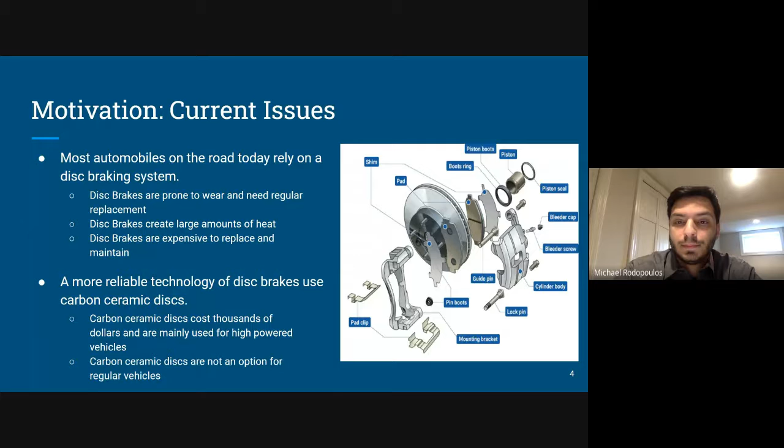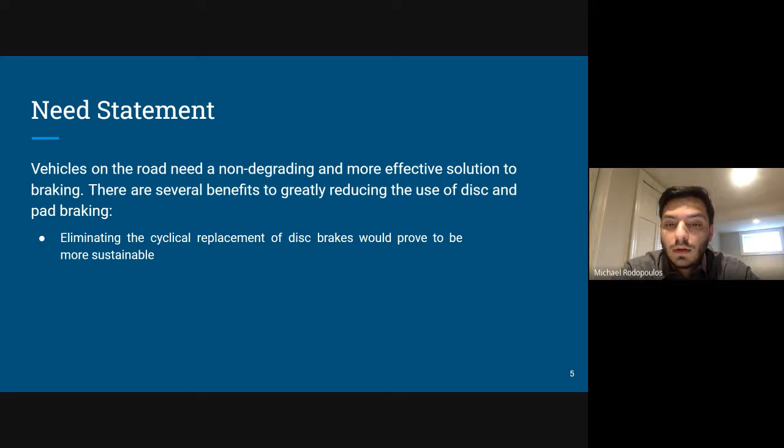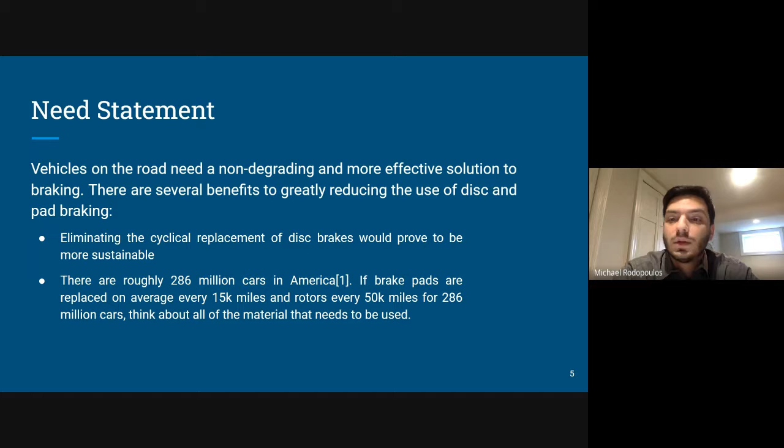So vehicles on the road today need a non-degrading and more effective solution to braking, and there are several benefits to reducing pad braking or physical braking, such as eliminating regular replacement and maintenance on braking systems. And based on interviews with customers, we learned that they would like to have a system that requires less maintenance, and that they would save money in the long run by not having to conduct regular replacement, maintenance, and things of that nature.

So for our project selection, at first we discussed magnetic clamping. This would be where we use electromagnetics to provide braking force using friction. It improves efficiency, but it still has the issue of physical wear. Next, we discussed a fully electromagnetic braking system. This does not provide enough force without running into issues of heat, and ultimately the device would not last very long.

So for the project summary, we decided to use a magnetic force using neodymium magnets placed in close proximity of an iron disc. The servo will be used to move the magnet into place. Object detection will be done using a LiDAR sensor, and it will detect distance and give us information to then provide braking.

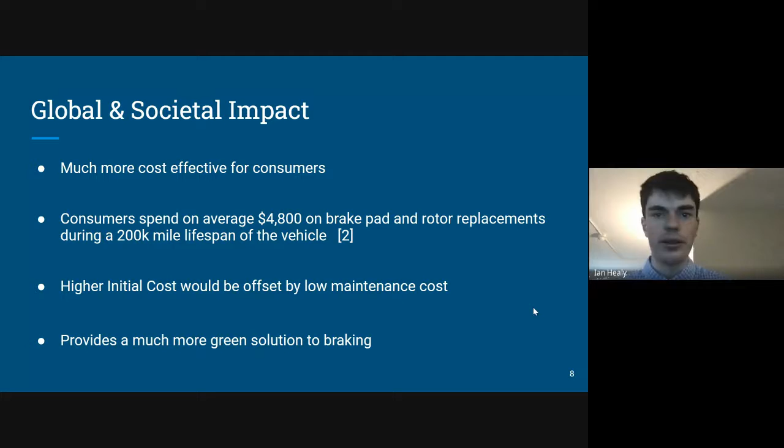So the reason, again, why we chose this problem is that it's much more cost effective for consumers. They don't have to spend so much money. On average, over a 200K lifespan of a vehicle, consumers will spend $4,800 on brake pad and rotor replacements. That's something we want to cut out. And if our solution does have higher initial costs, it will be offset by basically no maintenance cost. And it provides a much more green solution to braking.

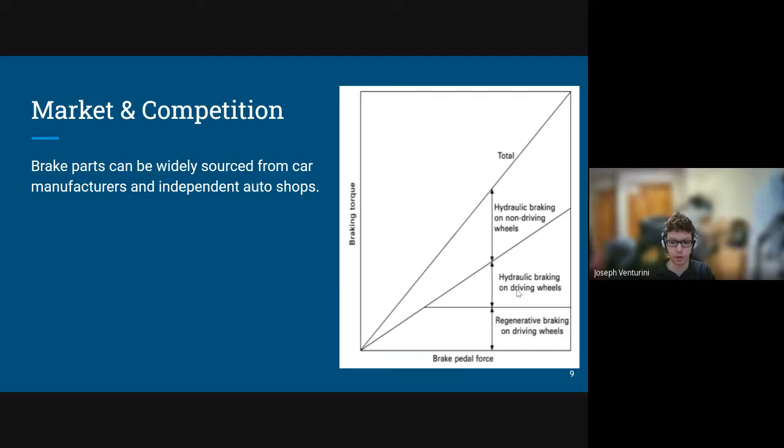So for our market and competition, brake parts can be widely sourced from car manufacturers and independent auto shops. Electric vehicles today utilize a regenerative hydraulic hybrid braking system. Regenerative braking only applies a small amount of brake force itself, and the hydraulic brake system still accounts for a majority of the braking torque, as you can see on the chart on the right, while regenerative braking is a little bit lower on the scale.

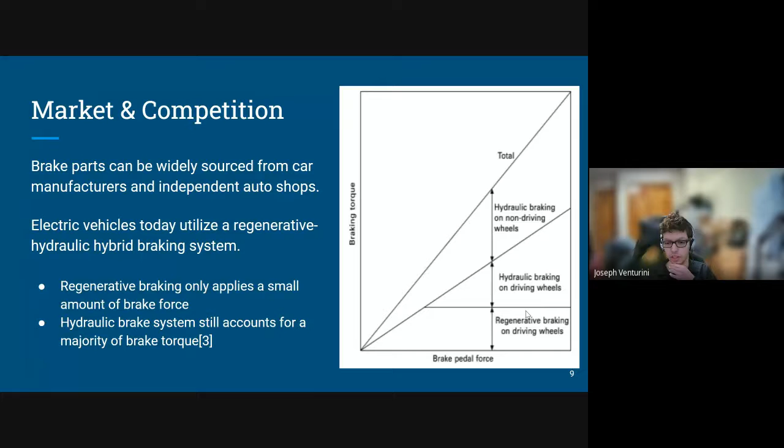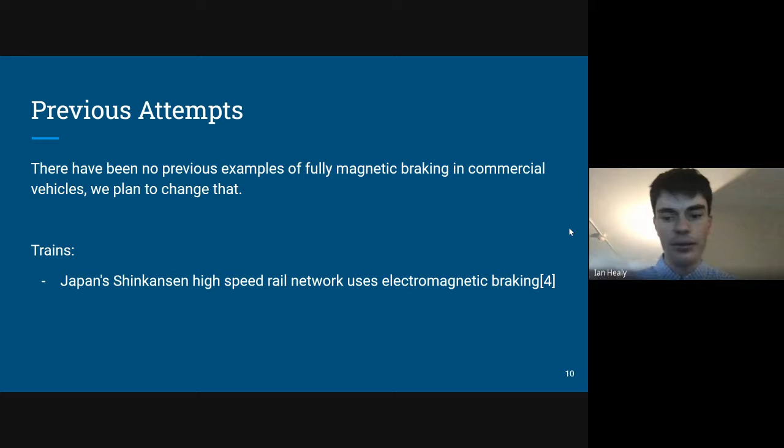So there haven't been any previous examples of fully magnetic braking in commercial vehicles. We plan to change that. But in trains, Japan's Shinkansen high-speed railroad has some of the best safety records on the planet. It does run on electromagnetic braking. Over the last 50 years, there hasn't been a single fatality or injury. So it just proves how safe electromagnetic braking can be if we can fully implement it in cars.

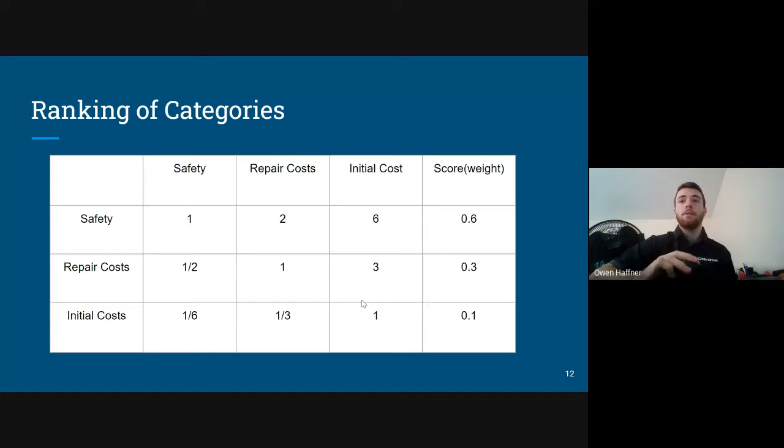So if it wasn't already apparent in the previous two figures where safety had the biggest number in the charts, safety is absolutely the number one priority, especially in any braking system, and should be in any project. In the case of braking, we don't want the system to brake too fast, like the way you stop short.

If the initial cost is higher than standard braking, then it should have much lower replacement and repair costs, as I said previously. Additionally, if the initial cost is higher, then there should be improvements in the braking performance with the lower replacement and repair costs.

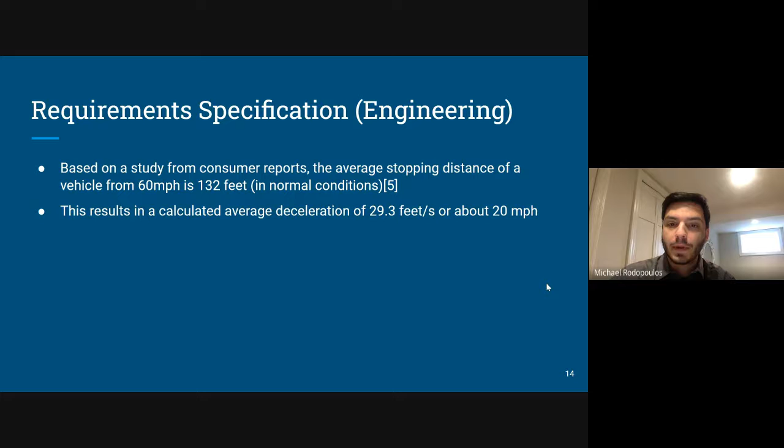All right, so some of the requirements for engineering the system. So based on a study, we found that the average stopping distance of the vehicle from 60 miles per hour is about 132 feet. That is in normal conditions using standard coefficient of friction. So this would result in an average deceleration of 29.3 feet, or about 20 miles an hour. And so we want our system to have about a max deceleration of 32 feet per second, which would relate to 22 miles an hour.

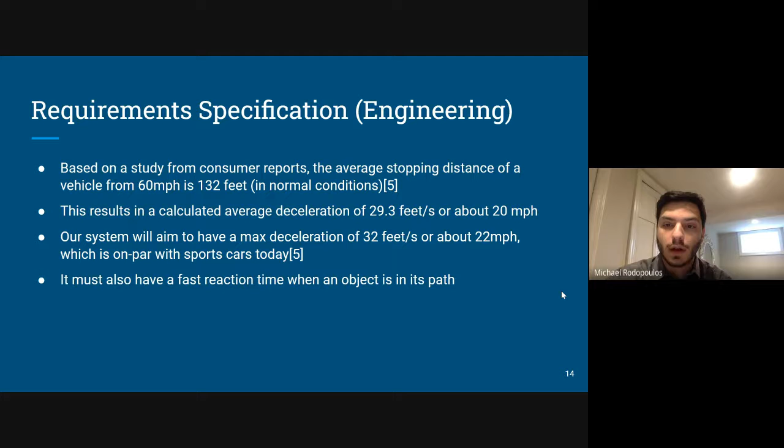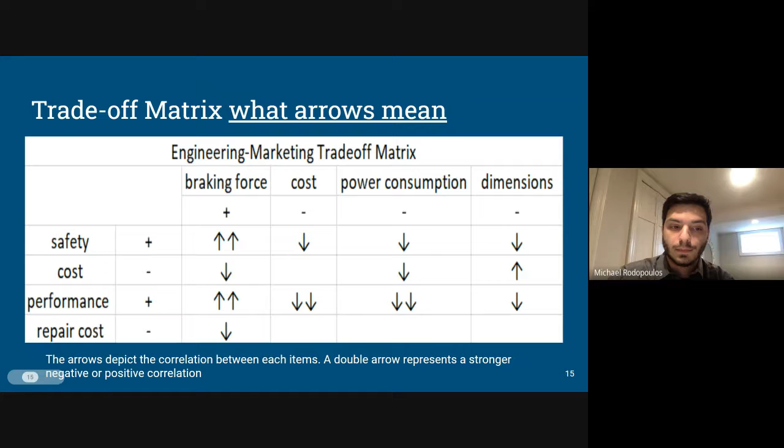And we also would like it to have fast reaction time when detecting an object to have maximum safety and maximum performance. Here's the trade-off matrix. So we have the arrows indicating how strong the correlation is, whether it's positive or negative. So as we can see, safety and braking force, they're both heavily positive correlation, whereas the performance and the cost have a strong negative correlation.

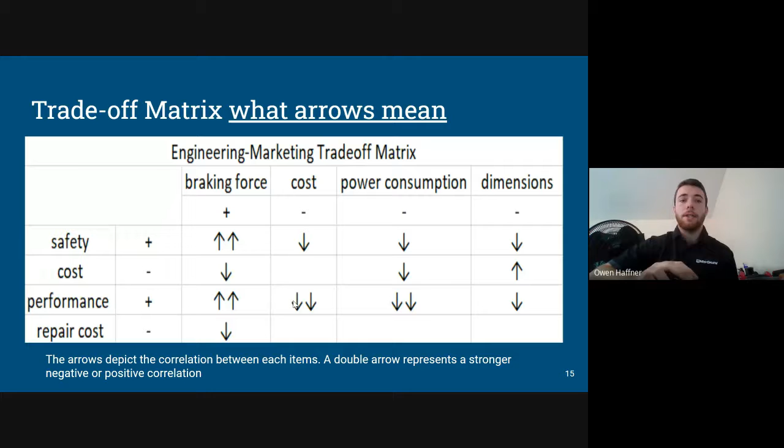Here's some of the theory that we used in our requirement engineering section. So using physics, we can calculate the distance needed to decelerate or to fully brake an object. That would be through the initial velocity over 2 times the acceleration. But that would not be a sufficient equation if we were, let's say, on a hill or some kind of an angled slope. So in that case, we need to account for gravity, and you can see the second equation. So now you're taking into account gravity, the road grade, and the coefficient of friction between the tires and the roads, which is variant depending on conditions.

And then also we can use magnetic equations to solve for the attraction force between our neodymium magnets and the pure iron disk, which would be A equals C over D squared. A would represent the attraction force. C is the coupling constant between the neodymium and iron disk. And then D squared would represent the distance between that magnet and the disk.

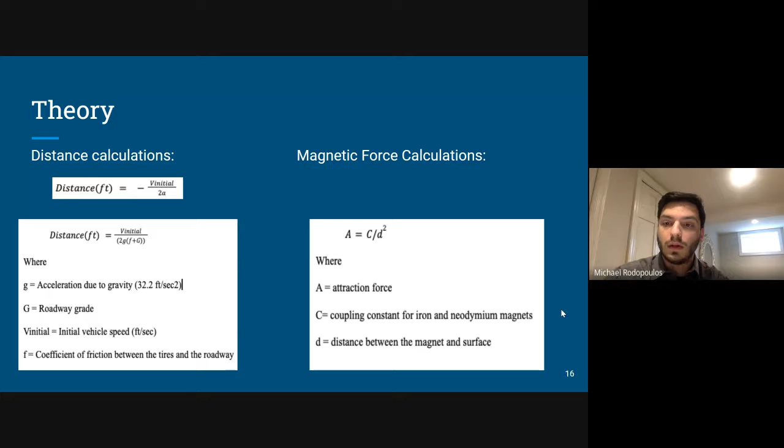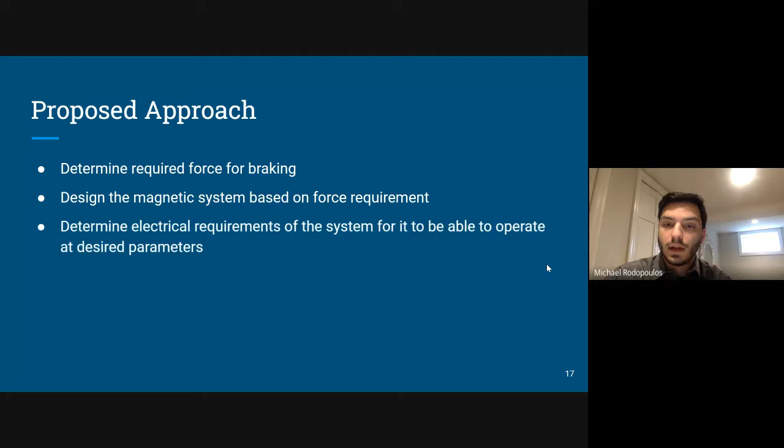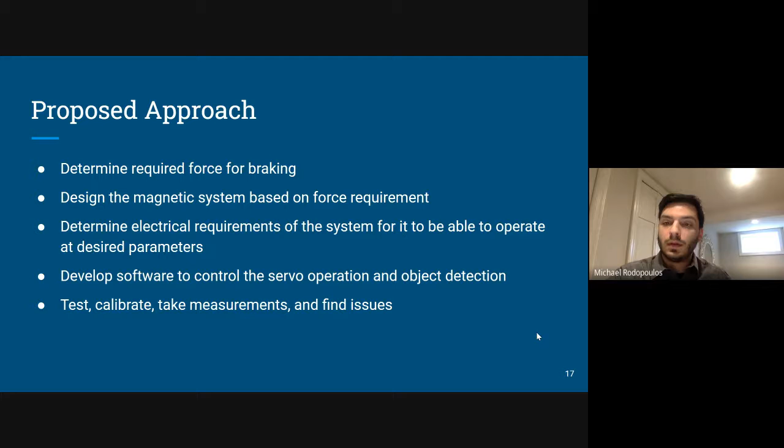So our approach, we first determine the required force necessary to meet our engineering requirements. And then from there, we are able to design the magnetic system and electrical components, which would be needed to operate at desired parameters. And then lastly, we can develop software needed to control the servo, to run our object detection system. And we can bridge that together with the hardware in order to have a complete system. And we would test our system, calibrate, take measurements, and solve any issues that might arise during testing.

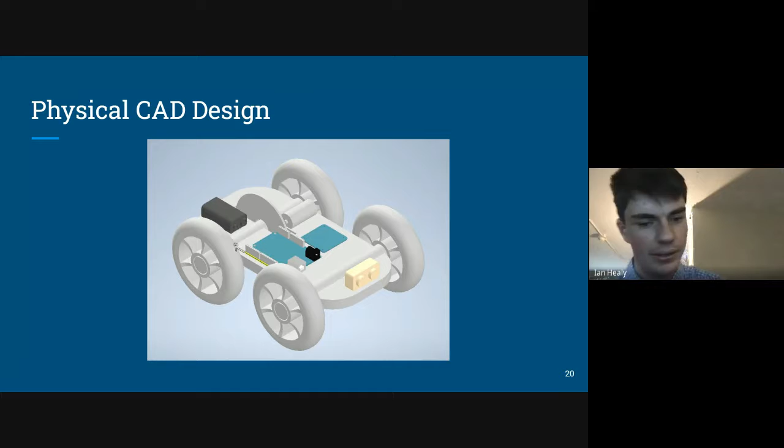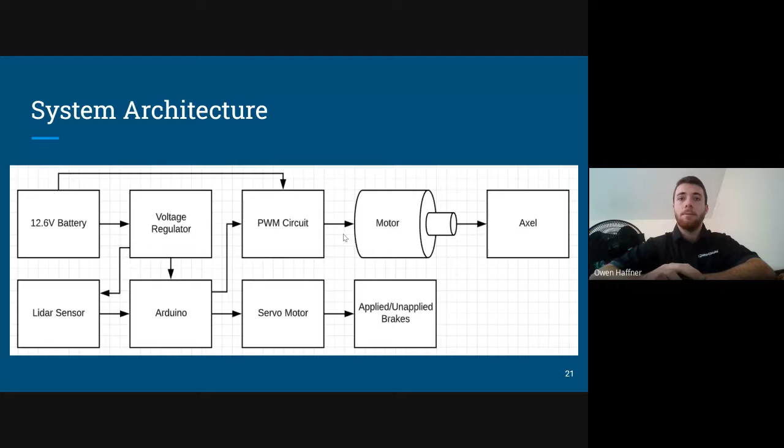So here we just have a little CAD design I threw up in Inventor. It just has a general outline of what our car should look like as a completed project. On this next slide, we have the system architecture, basically just showing the overall block diagram of what's going on here, very similar to the last slides, involving the PWM circuit, as we'll see in the next slide with the electrical schematic, the motor driving the axle, so on and so forth.

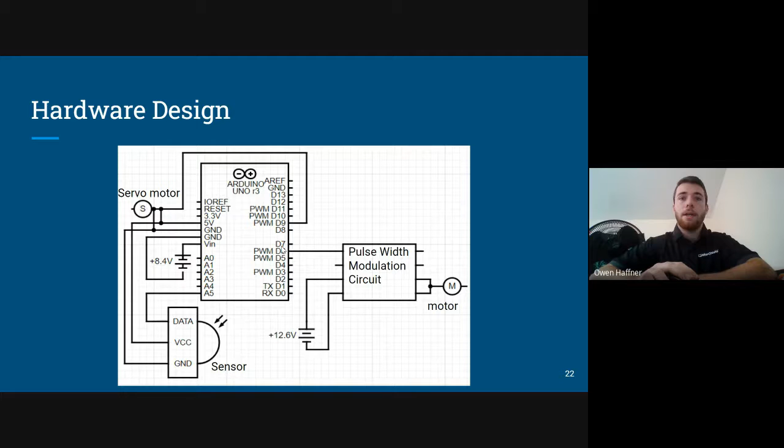So now the hardware design, we have the sensor. You can see the input. It's taking power from the Arduino Uno. The Arduino Uno is getting power from a voltage regulated power source. The main battery is powering the motor, which is modulated by a pulse width modulation circuit, which is also controlled by the Arduino Uno, taking input from the sensor.

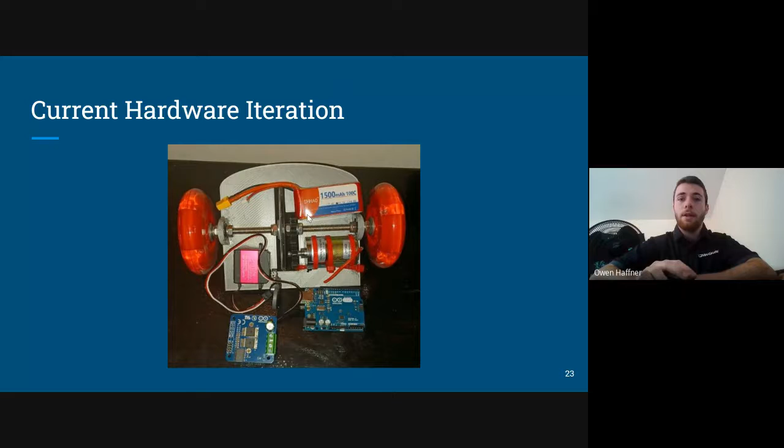This is the picture of the current design. We have the front half of the car built right here. It's involving the motor, the servo with the magnetic plate, moving into position with the iron disc. This is the battery, the lithium polymer, Arduino Uno, and the PWM circuit.

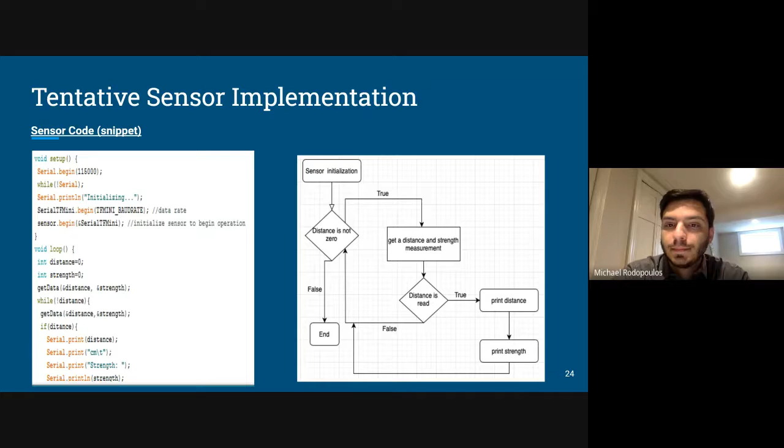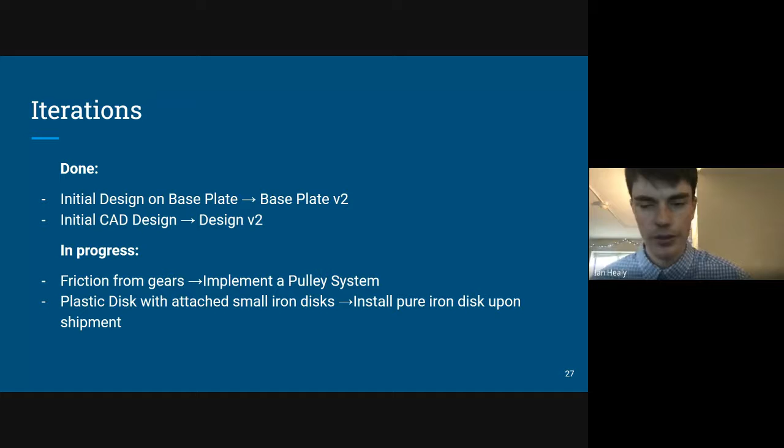Here we just have some of our iterations. We had initial designs of the base plate that were changed and CAD designs that were changed in progress. We're having friction from gears, so we plan to implement a pulley system. And we also plan to install a pure iron disc upon shipment. It's shipping right now, but when that comes in, we'll be able to add that.

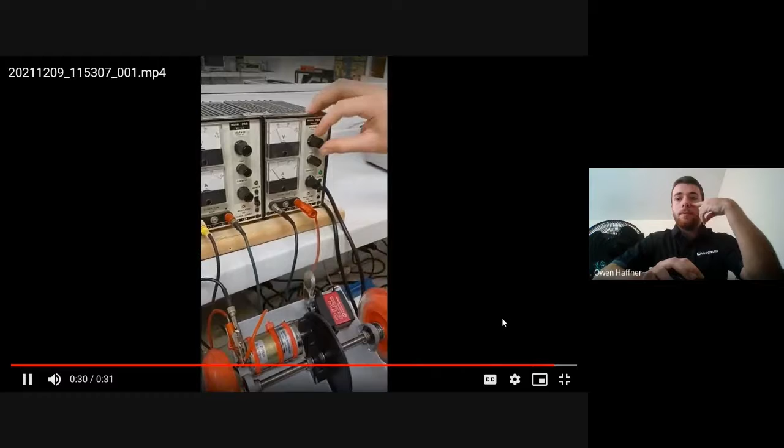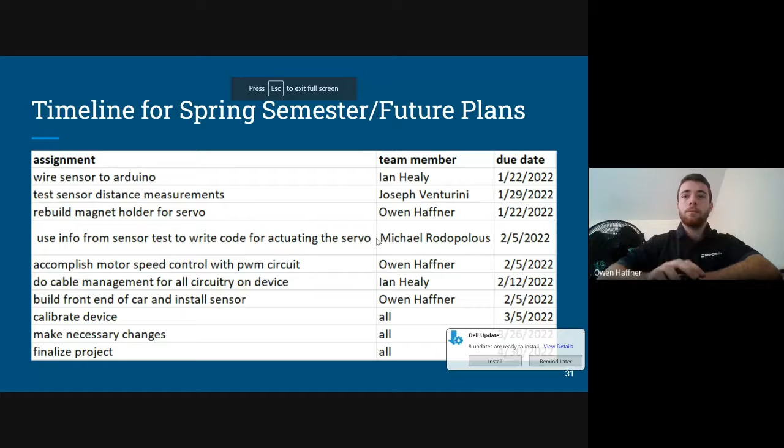So we're looking to, in the future, smooth out that motion with the gears. Next slide. We just have a short timeline for our spring semester and future plans. I'm not going to go into detail.

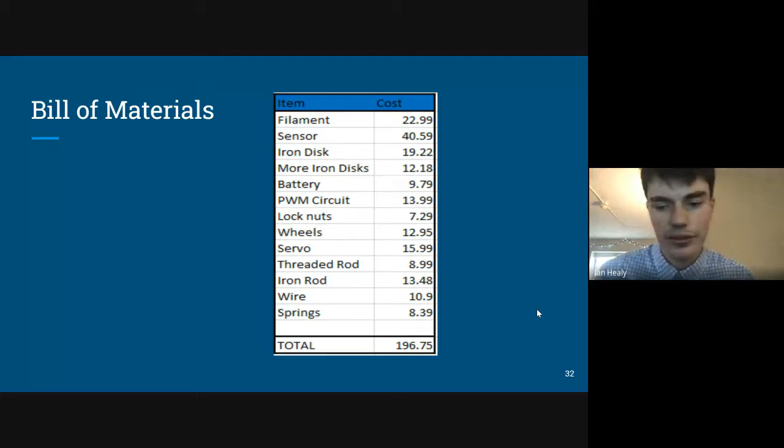And here's our bill of materials. We've bought all the parts already, so our cost is under budget, and we plan to stay within the budget allocated.

So for the future work, we are planning on finding a smoother way of using the motor to drive the axle, so it could possibly be a belt-driven system. We will have to use the sensor and get that to work properly to get accurate distance measurements. We then have to combine the code with the hardware to move the servo, provide the proper amount of braking force, and then calibrate the device.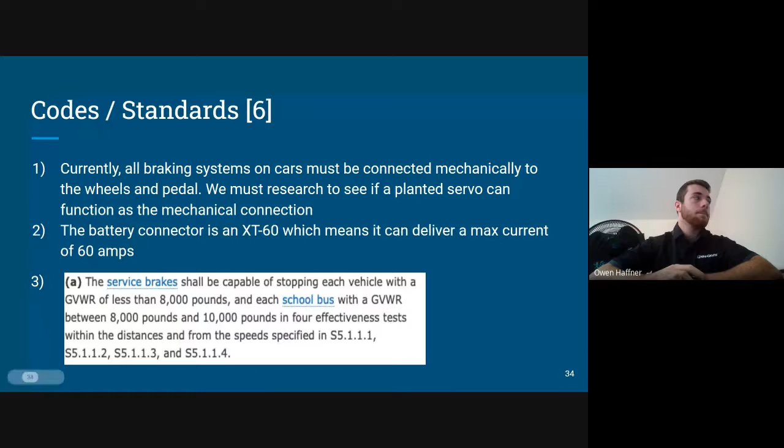So we just have some codes and standards, so I'll make this quick. Currently, all braking systems have to be connected mechanically to the wheels and the pedal. We need to research to see if a planted servo can function as a mechanical connection. Our battery connector is an XT60, which means it can deliver max current at 60 amps. That's a standard. All battery connectors use that.

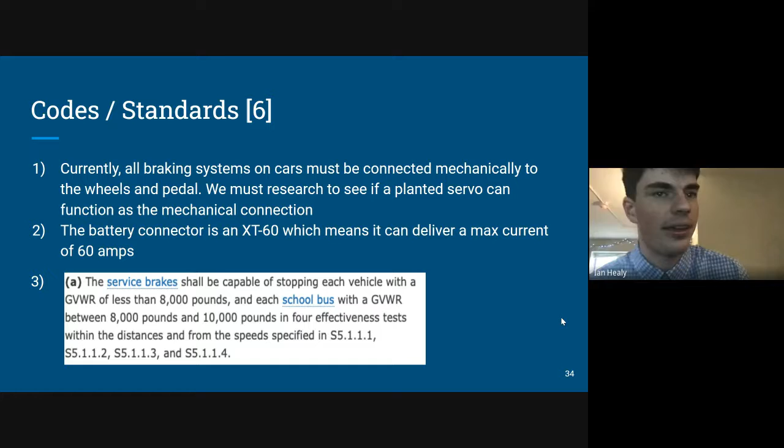And also we have some of our testing at the bottom there. It's some codes that all braking systems must go through. They have specified speeds you need to brake at in effectiveness tests, and we're going to test those and see how we compare to brakes on the market today.